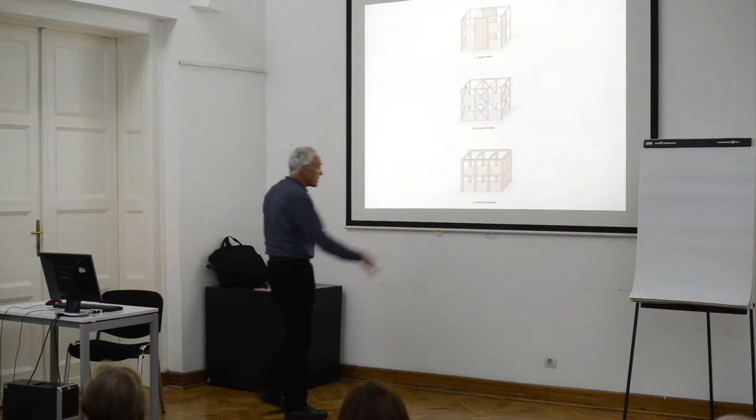And I'm going to start with shear walls because, in my opinion, shear walls are the best system to resist earthquake. This is based on earthquake damage observations throughout the world. Shear walls have always performed best. Then I will talk about cross-brace frames, and then we'll finish with moment frames, which are probably the most popular among architects because of the openness and transparency and the circulation possibilities. But moment frames are the most sophisticated of these systems. They're the most difficult to build safely, and also they're the most flexible.

Before I move on to shear walls, I just want to say a few words about post and beam structures, or trabeated structures, and load-bearing walls. Post and beam structure, of course, is the oldest structural system in the world, and it is great for gravity loads. Beams and posts are great for resisting gravity load. But if there's any horizontal load, this will collapse, won't it? It becomes a mechanism because of the pins. Load-bearing walls are also very good for gravity. But we always have to remember that when walls have loads in this direction, they are very unstable and dangerous, just like post and beam structures.

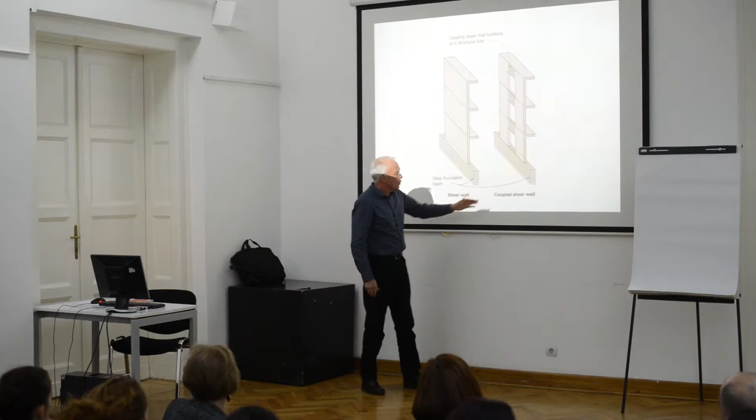And if we want large openings in a shear wall, we more or less have to create a coupled shear wall, which means that we have special diagonal reinforcement if we are working with reinforced concrete.

So what are the materials of shear walls? Well, I think you know the best material is reinforced concrete. Then we have reinforced concrete masonry. Then maybe we have confined masonry, which is the construction typology in this part of the world.

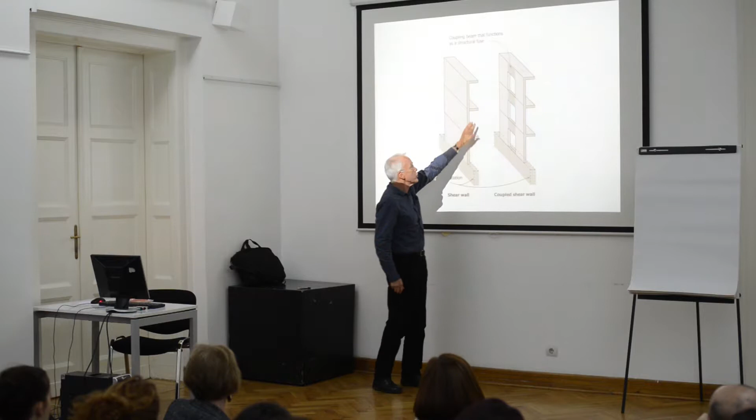And in my own country and in the west coast of the States, we have a lot of plywood shear walls. And so using plywood, these floors would be wooden floors, and the plywood would create the main component of the shear wall. And so shear walls can be of these different materials, but the main principle is that they start at the base and they're continuous up the height of the building.

And they could be of any material, probably most commonly steel, but they could be of reinforced concrete, and they could be of wood construction. That would be quite common as well. And so they would be the main materials for these cross-braced frames.

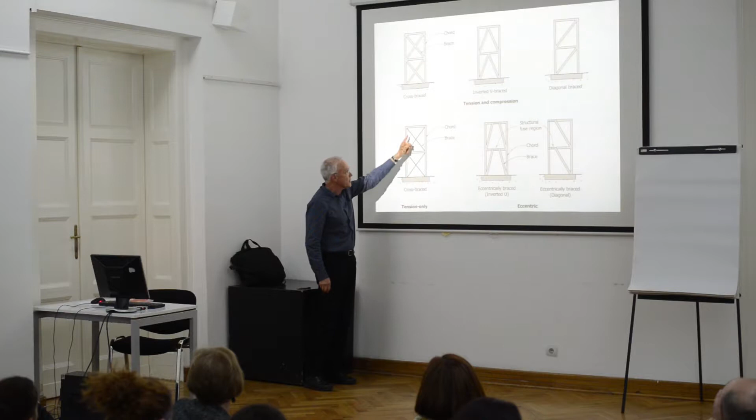For light industrial buildings, this type of bracing is very popular, like for factory buildings, where we would have tension-only bracing. So the bracing members would be of small diameter, and so they're only capable of resisting tension. And so this is a reasonably suitable system for low-rise and lightweight buildings.

And then in more recent years, we've moved to eccentric bracing, which is an unexpected move actually, because for the first time engineers are moving away from triangulation, and they are deliberately creating eccentricity, deliberately avoiding triangulation to create what we call structural fuses.

How do you say fuse in Serbian? Is it an easy translation to make?

And so the philosophy is that this is the fuse region. And during an earthquake, the damage occurs here and nowhere else. And the idea is, after an earthquake, we hope we can repair or replace these fuses.

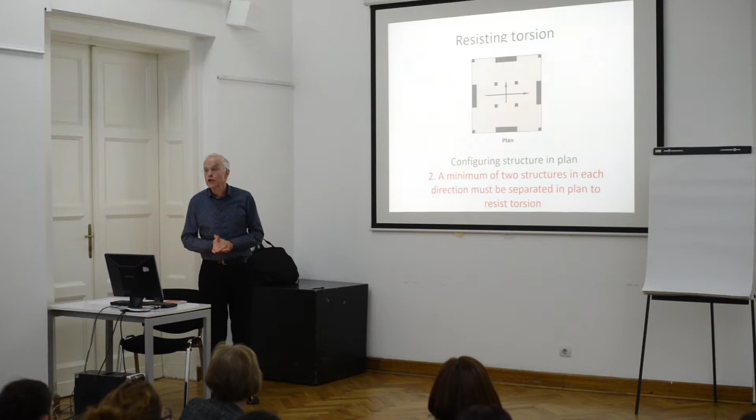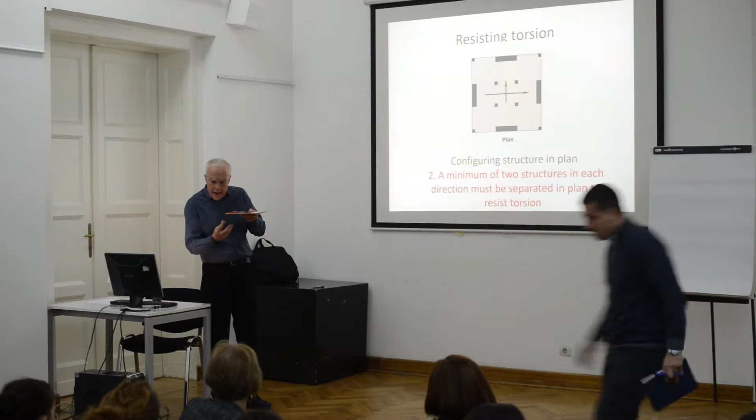The second principle, and I think there are really only two principles, is we've got to design our structure to resist torsion. Because if this is the plan of our building, during an earthquake there would always be some torsion, possibly caused by the migration of the earthquake waves under the site of the building. That can cause torsion. But more commonly, it's due to the fact that the centre of mass of the building is not identically located with the centre of strength or the centre of stiffness. And so we can assume that during an earthquake, every building is going to start twisting in torsion.

So how do we solve that? Well, in order to solve that problem, we have to apply the second principle. And this is also quite simple, but it can be quite difficult. We must provide a minimum of two structures in each direction, and they must be separated like that, separated in plan to resist torsion.

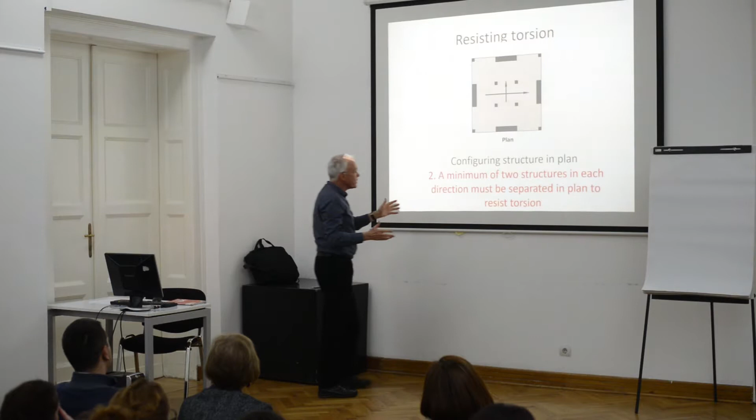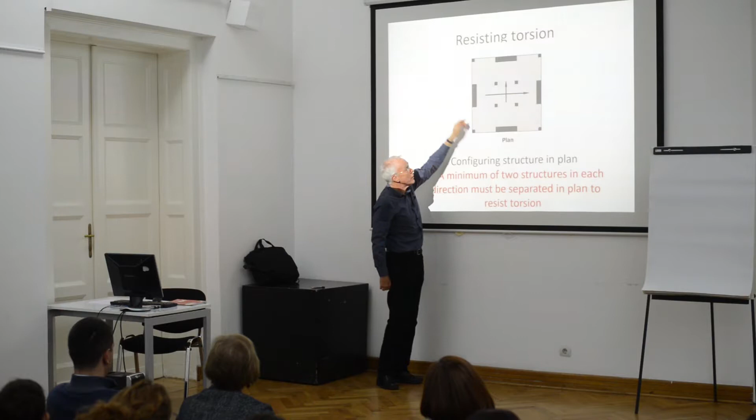So if we are designing for an earthquake-prone zone or region, we should always have a minimum of two structures, like two shear walls, or two moment frames, or two cross-braced frames in this direction, and they must be separated in plan so that when the building twists, these elements can resist the twisting. And the same thing applies in this direction: we must have two elements, separated in plan to resist the torsion.

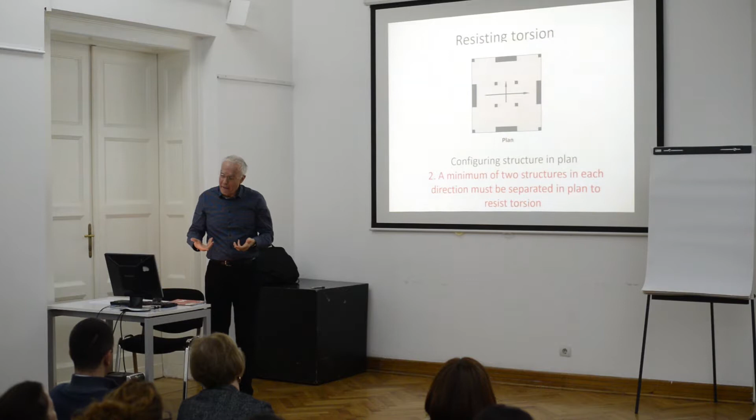And if we satisfy these two principles, we are well on our way to achieving a really good seismic resisting configuration. The best place to put earthquake-resistant structure is on the perimeter of a building. That is the best place because it gives us the greatest distance that helps withstand the torsion. And so when we are thinking about a new building, that's probably where we should begin.

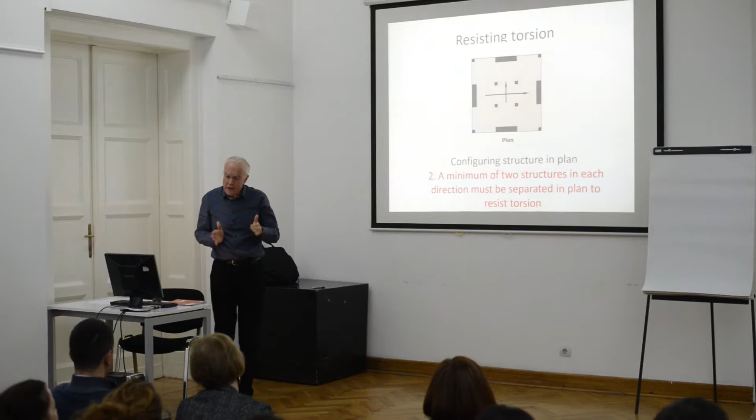We should discuss, architect to engineer, if it's possible to have our seismic resisting system on the perimeter. And if it's not possible, well then it still might be okay, but we have to come up with a different solution. So if this is not possible, maybe it would work to bring those shear walls closer, maybe to have a structural core. And an engineer would be able to make that work. And so there are many different possibilities.

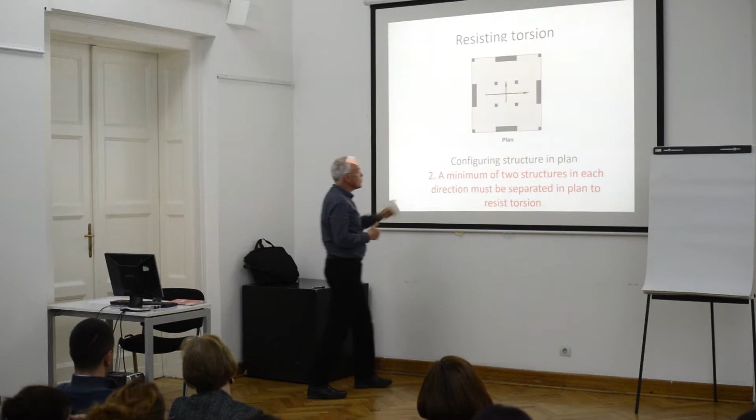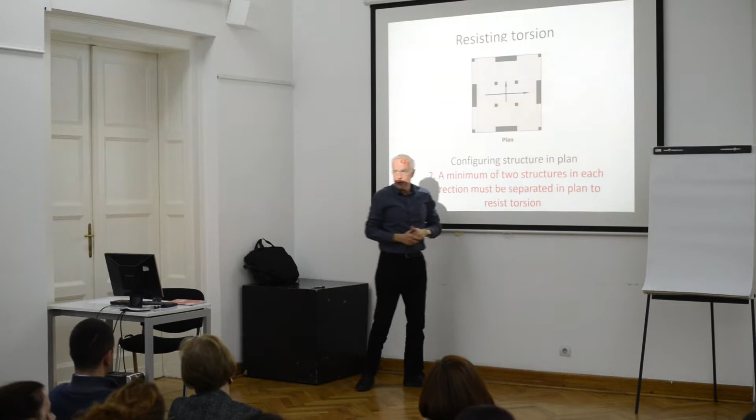And in fact, these walls, like this shear wall, could be down here. This wall could be up there, because we've still got that separation. And so there's a lot of flexibility that architects appreciate in the way we can configure the structure in plan.

Now I want to introduce the software to you.

In order for you to be able to size your structure. I mean, it's all very well you making a decision: I'm going to use shear walls in this direction of my building, and in this direction of my building, I'm going to use moment frames. Now, you can easily make a decision like that, but the next problem is, how big are these elements? How long are the shear walls? And what material? And how thick?

And so this is some software that I co-developed many years ago, and we updated in 2014. You can use Google and find the software called Resist, and you can download it for free and use it for your designs. It's for preliminary design, and there's no calculations required. And all my architectural students use it. I'd be telling a lie to say that they love the software, but actually I think they like it because it's so easy to use.

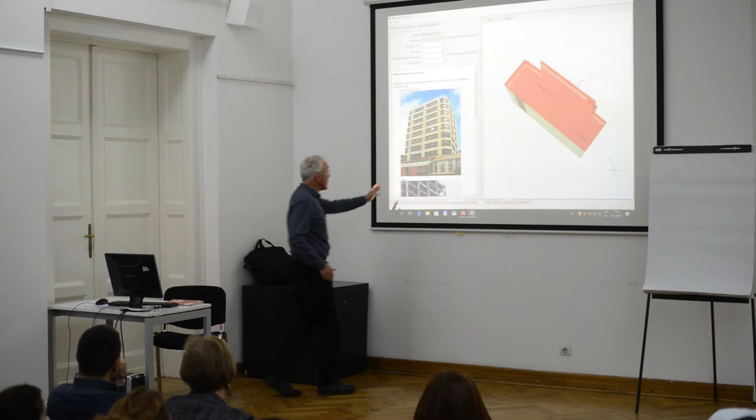Okay, well, let's say as an architect, I'm really thrilled with that design so far, and so now I'm going to design in the Y direction. And in the Y direction, let's use moment frames, just for fun. And so this is what a moment frame can look like. I'm really embarrassed to say this is a building from my own campus in Wellington. And I've never seen such a boring moment frame, right? This is terrible, isn't it, from an architectural point of view. But structurally, the civil engineers love it because it's regular and it's on the perimeter. So it's quite a sensible structure, but it's got no architectural merit.

So our job is to decide how many moment frames we want. And we've got an infinite range of choices. If we wanted to, we could just have 2 moment frames in our building to resist all the earthquake forces. And that would mean that, of course, we would have a lot of columns and beams in the body of the building, but they would just resist gravity load. And we could design this frame and that frame to be the 2 elements that resist earthquake. It's our choice to make. If we just have 2 frames, the members are going to be quite big.

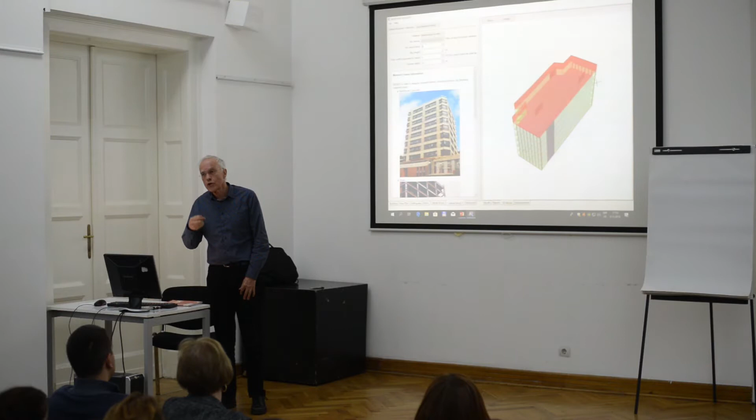And then we have to choose how many bays per frame. At the moment we've got 2 bays. But you see, we could just have 1 bay frames. Or we could have many bays. And we could reduce the bay length like that, you see. And so I think you can begin to see we've got so much flexibility in the way we can configure the structure. And so the architect is always thinking, what is the best configuration for my program and my concept? And you use the software to test your different ideas out. And then you choose the one you're most happy with.

I don't like this design at all. So we're not going to do that. We're going to have just a few bays, maybe 3 bays, and we're going to have a longer bay length. Yeah, say about 5-metre long beams. So we go to the floor plan and we just tidy that up a little bit.

And so now I come back and I look at these frames, and to my New Zealand eyes, these columns look too weak. They look far too weak, because I've only got 2 frames. And the rest of the structure, remember, is just resisting gravity. And so there'll be many, many columns in the plan here, columns and beams, resisting the gravity loads.

Resist doesn't design the gravity structure. So anyway, I don't feel happy with these small columns, and I'm going to increase the size to make them a lot stronger. And I'm basically copying this, aren't I? So please excuse the architectural features here.

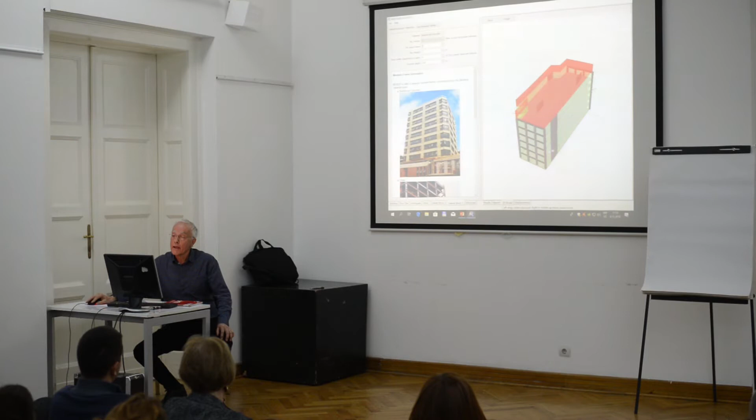So let's say I feel happy with this. Then we go to results. And if we see any red, we know we've got problems. Like I'll just talk about this. This is for the moment frames. This is for wind loads. And so this is for the shear force in the members. They're at 32% of the shear strength of the beams and columns. No problem. The bending moments in the members under wind are 37% of their capacity.

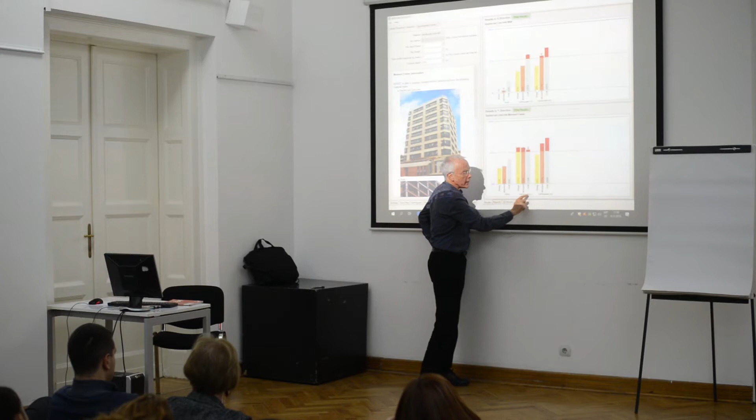No problem. And the drift means the horizontal deflection of the building. That is 62% of what the code allows. No problem. We've got 2 categories, the ultimate earthquake and the serviceability earthquake. Like this could be ultimate and small earthquakes. And for both of the earthquake scenarios, we've got problems because the shear forces are greater than 100% of the code allowable. The bending moments are greater and the building is too flexible. It's drifting too much.

And it's even worse for the small earthquakes. So this would mean in a small earthquake, the building is drifting a long way, and there would be a lot of damage to architectural elements. Like all the walls would get really badly damaged and have to be replaced, most likely. So I've got a problem here. My structure is too weak and it is too flexible. And I've also got a problem with my shear walls. They are okay in shear and moment, but they're too flexible. The drift is more than 100%.

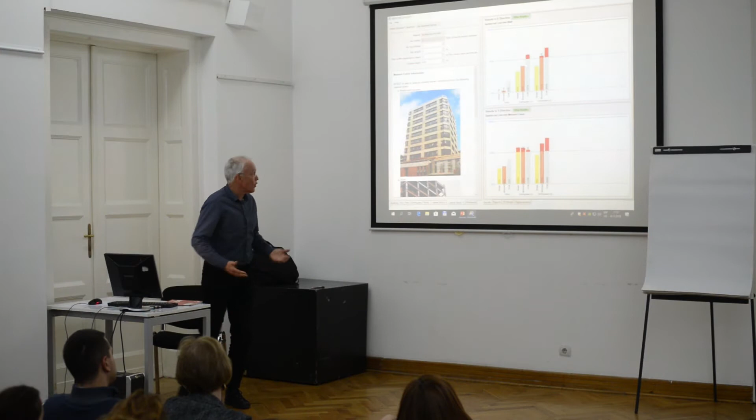So anyway, I'm going to increase the size of these members and see if it becomes ridiculous or not. It's becoming a bit ridiculous. Done. What does it look like? Horrible. Looks terrible, doesn't it? No architect would want that, would they? Please say no. So this is not a good solution. So what am I going to do? I'm going to put in more moment frames and reduce the dimensions.

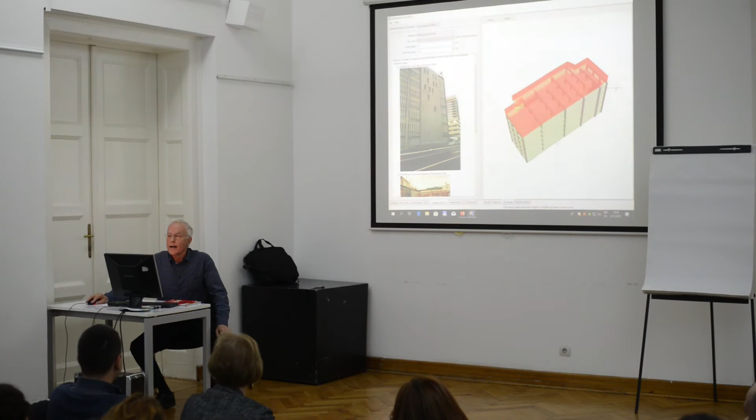Let me just show you what the cross-brace solution is. Here's the cross-brace solution. I can just switch off the roof to make it a bit clearer. You can see we've got a steel solution. If we use eccentric bracing, and we can adjust the bracing size to make the braces a bit stronger. And let's see how that works.

This is with the steel bracing. That works fine actually. So I've been a bit conservative. I can reduce the size of the braces. And there we are. That's our design complete for a steel brace solution. And so I hope that you will use the software just to investigate all sorts of options that are available to you.

And as always, keeping in mind your program and architectural idea, because both of those you must try and preserve as much as possible. You want the structure of your building to reinforce your design concept, and also to give your building the best possibility of meeting the client brief.